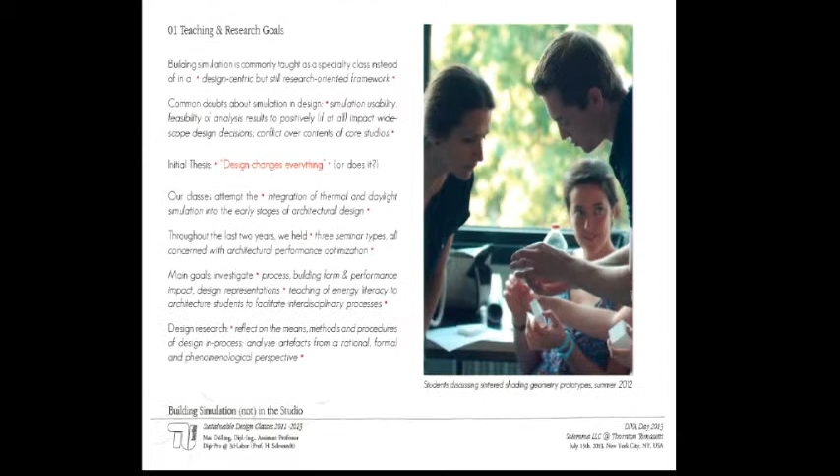Now, there are many doubts in design more than in building simulation about applying simulation in design. And those doubts include the usability of simulation, the feasibility of analysis results to positively and meaningfully impact design decisions, and that doubt still persists. And of course, a conflict of a political nature over what should be in a core studio. So our little initiative is designed to address several of these doubts and come to conclusions to then make recommendations how we can proceed with integration of these technologies, which are ultimately ways of thinking and not technologies, into the design process itself.

So there's the laser there. So what we're trying to do is, of course, investigate process, building form and performance impact on form, as well as design representations. And of course, teach energy literacy to a maximum number of architecture students in our case. So there's no technology students, it's just architecture students. To facilitate interdisciplinary processes and have them be emancipated actors in this ever-widening field that we find ourselves in. And the framework that we're operating in is a design research framework.

And to me, that includes that you should reflect on the means, methods, and procedures of design in process. And it's not a static thing where you create a result and then you analyze it and you're happy with it. But it's a process that continuously evolves as the design evolves, which of course makes analysis of design artifacts really difficult. And that has to be done from a rational, formal, and of course from a phenomenological perspective, meaning that in architecture you talk about artifacts having more value than just a pile of bricks. It's something more than that. Excuse me.

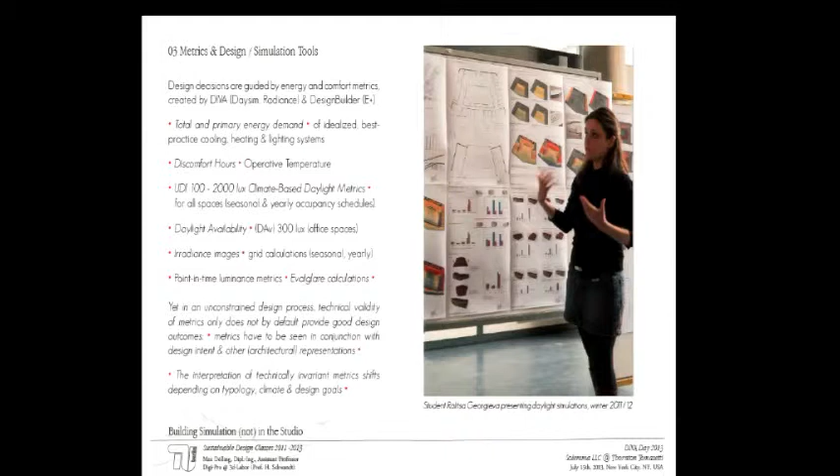So you can talk about technicalities when it comes to metrics for a very long time. What became apparent to us in the process after a while is that the technical validity itself of these metrics doesn't, of course, by default provide good design outcomes. The metrics, you got to see them in conjunction with design intent. Any given project is different, and alongside other architectural representations that encode design intent. And the interpretation of them also shifts depending on typology and climate and design goals that we have, and we'll see them shift around a little bit in the case studies right here.

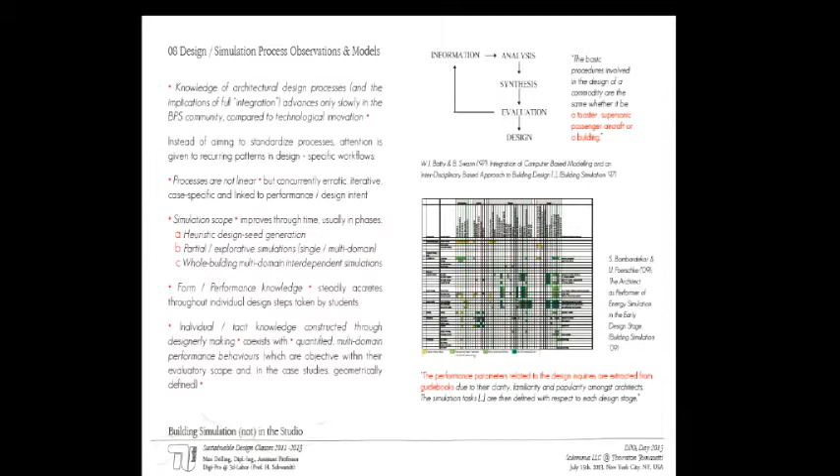So beginning maybe in 2011, there was, to me at least, a very influential paper. It's called Think Designerly by Rudi Stouffs and Raoni Venancio. And that finally began to realize that the focus of simulations is or might be to solve design dilemmas. And that was a really key moment, that we try to get away from the completely hermetically sealed parametric design processes that start with every question and end with the answers to that question. And if you insert another question in the middle, it's just going to break, right? So Venancio and Stouffs really made a major contribution.

Ironically, when you look at this chart here by Christopher Alexander and Chermayeff from 1963, what they already knew about architectural design thinking way back. This is a chart of design factor influence interlinkages. It's like two dots and they connect, and then this influences that. So 63, 2011, and we're sort of inching closer to one another.

And based on what we learned, we started to come up with our own process model, if you want to call it that. And that's more like a dynamic field. And if anything, we've succeeded in making it look different from the models before that. It looks a bit more organic, so it's very important when you come up with these process models that they have to at least visually be differentiated. But all joking aside, I'm actually quite serious about that one, because what you usually have is many different performance domains, and design synthesis. This is not a static model. It's actually achieved when they overlap, and it's all embedded in design intent.

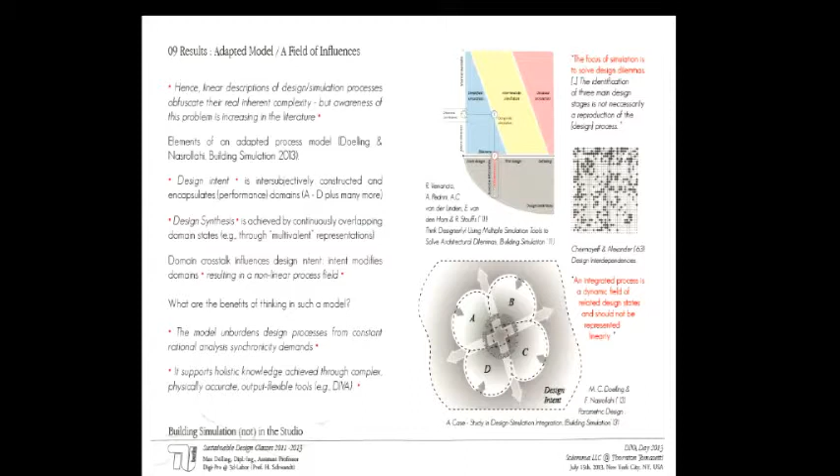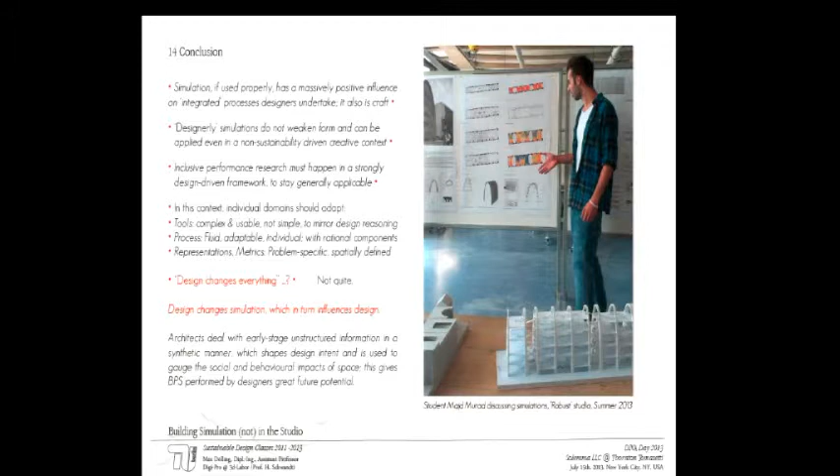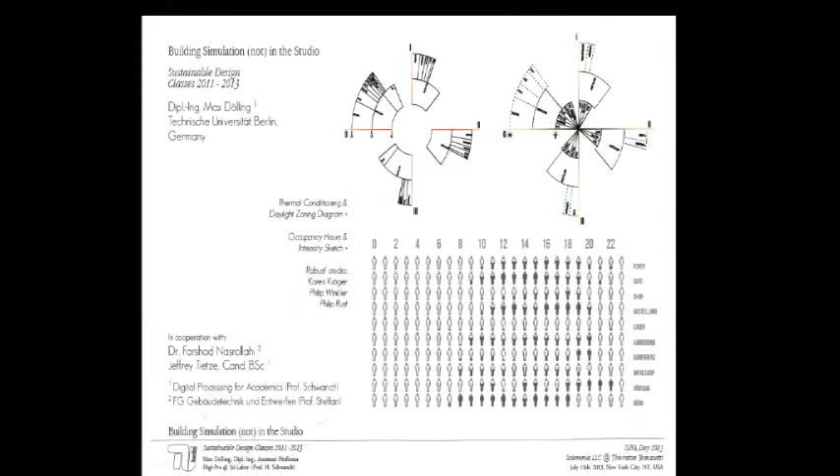I'm just wondering how you did on time in this semester. Do you feel like this was a lot to cram into one semester, or do you feel like the students had... Which semester? The Robust one here? Maybe you could talk about each of them. It seems like I'm trying to teach the same tools as you in one semester, and it is kind of challenging at times. We had three of them. Pick one. Time, as far as you're concerned as an educator, not your personal time, but in the course of the semester, trying to cram everything you want them to learn into one semester.

Okay, we had at least one 3 to 4 hour lecture every week, so that was more than 12 to 14 hours of just someone talking, be it me or my colleagues, which is a lot. And then you probably have the same amount of time just in rough tutoring. This semester was extreme because we had this class and this class at the same time, so I was jumping back and forth between two studios. And you've got to bug fix models, and it's labor intensive.

It's more labor intensive than design studio education, where you can go there once a week and tell them, look, I don't like that, can you fix it? And you come back a week later and they fix it, right? It doesn't work like that in simulation. You go in there and a week later they're back and the model is all, what are those set points? Okay, do it again. So it's a labor intensive process.

Approximately how many students are you working with at a time? How large are your class sizes? About 20. This semester was more than 30, but in groups of 2. So at any given time we have 15 or more projects in 3 to 4 different climate zones that we have to do consulting on, basically, us as teachers, which is hard.

And you were the only one? No, I did 1 semester alone of this. There were not that many students, so I'm glad. And then there's usually just 2 of us, but my colleague's not full time, so yeah, it's doable.

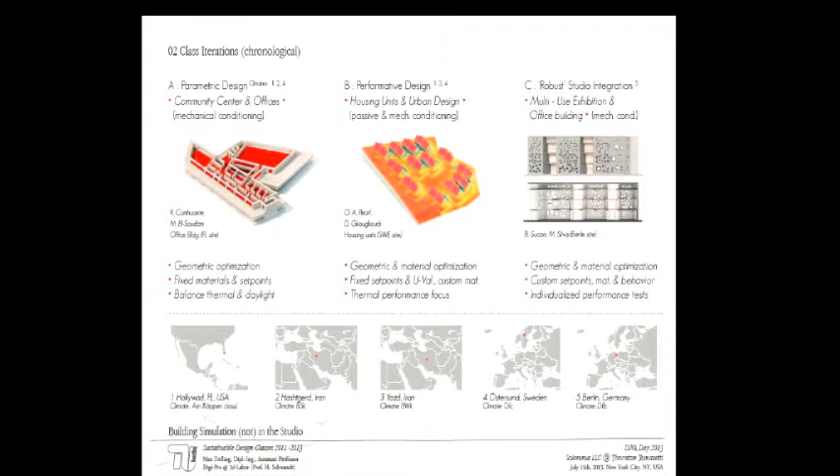Were there any steps or concepts that were really hard for the students? I think daylight is in many ways easier to understand because it's something you can see, and visualizing thermal ideas is much harder. This is something I'm not going to talk about much, I'm just going to show it. I skipped it because of time, but this is a tool that I'm going to release in September that does space-based multi-zone thermal metrics mapping, and it was intended to be used in class, but I didn't get it finished on time, to my shame.

But this maybe demonstrates that what designers need is a visual appreciation of where certain loads occur, multi-metric: this is solar gains, this is the cooling load, and this is the air temperature. And you can see that east-west is more and stuff like that. Everybody in this room knows that. Designers or students don't. So this is why they need something like this, or of course DIVA, because this is directly inspired by DIVA, just in the thermal aspect. But yeah, thermal abstraction is hard.

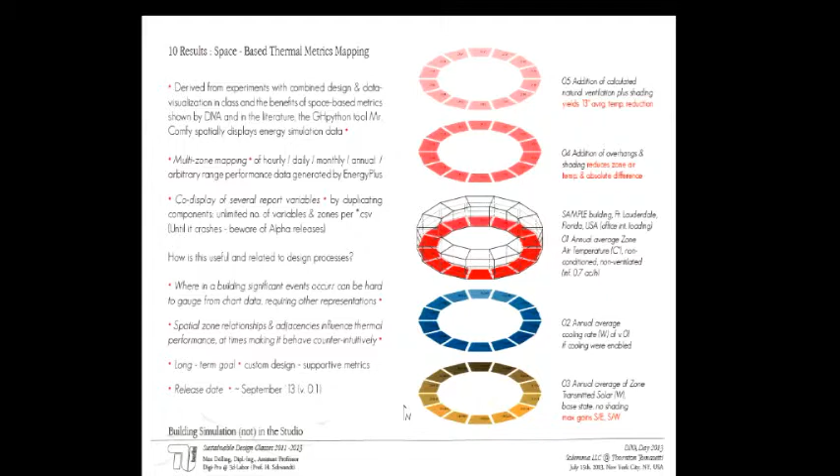I was just curious if there's any hands-on analysis, in terms of understanding where these things come from, like east-west, north-south, especially if you're doing one in Berlin, where you guys are located. Are there any analog tools to complement the computer tools? Yeah, I don't know whether I have any image of them in this presentation. Maybe.

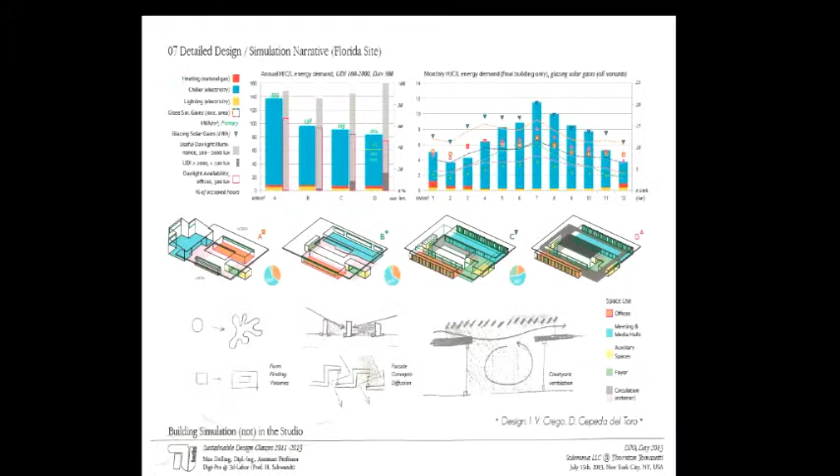No, but we built sintered prototypes. We have a laser sinter, which can build really intricate shading geometries, for example. And we iteratively prototype stuff like shading screens. It's nothing I wanted to dwell on today, but this is stuff we're doing. And they have models they can play with in the light, or facade sectional models. So there's a hands-on part.

I personally find it sometimes really limited because you can't do thermal stuff in a scale model. And we want to do that in an integrated fashion all the time. We know that the climate-based metrics are thermally correlated. As I said, improve them, and you will improve thermal performance almost automatically unless you really mess it up. So the hands-on stuff is probably not as much as I would want it to be.

I wonder if you'd comment. I think it was beautifully put when you said basically that in a good design, loads go down and daylight goes up. That's not necessarily the case in a lot of design, because it's often identified as a dilemma. So we'll attach something to that window to make it work better. But to go back and work the massing and work skylighting and these things so that you don't resort to those solutions early on, I think it's great.

Thank you. It means a lot.

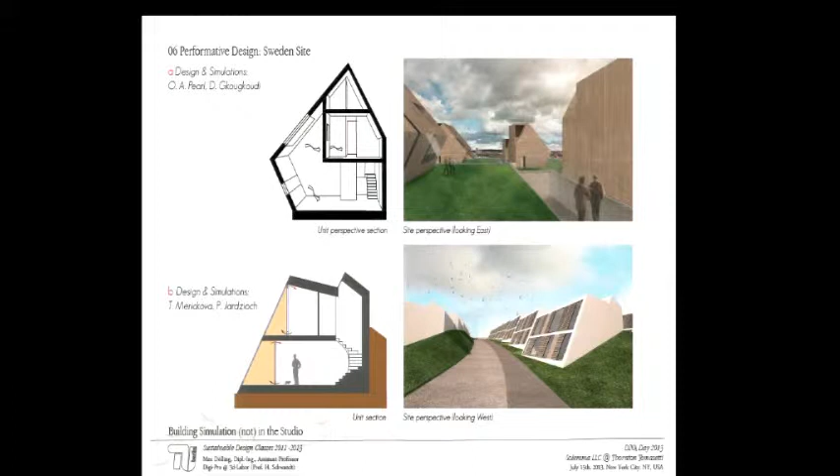You shift around between using the UDI. It's not in that one. You had the bar graph with less than 100, 100 to 2,000, above 2,000. This one? And then sometimes you're using daylight availability. Oh yeah, you see it best here. You're gravitating towards those metrics that are trying to identify or penalize overlit conditions. Where are you going with that? When do you use one versus another, or is there a certain metric that you prefer?

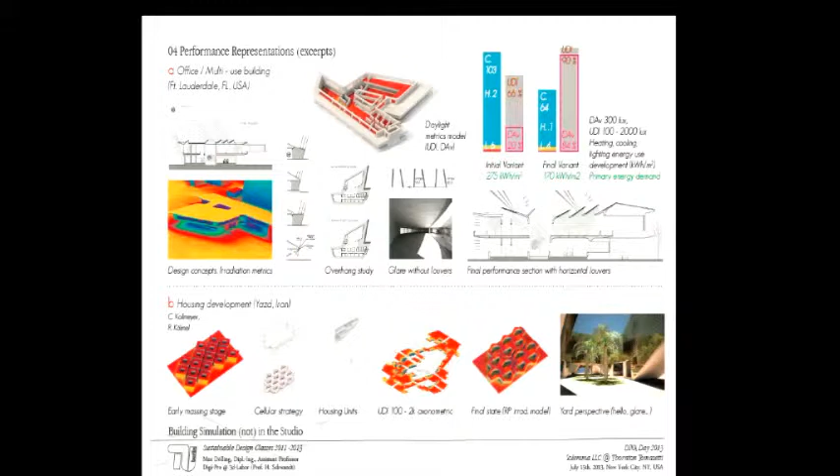I think what students understand best is actually this one, which we usually never use, but we had to use it in this case. Oh God, do they have it on here? No, I'm sorry, but basically with this group, when we worked out how they're going to present to their studio professor, we used daylight autonomy because overlit is white. So dark is really dark and white is lit. Whereas in the UDIs, understanding these three bins is challenging. Once they get it, they love it because they can really control what they're doing.

Do I have too much? Do I have too little? But for general purposes, I think autonomy is really good, and we rely on that massively in studio. In our own class, for specific purposes, I love, and students also love, the DAv because of the overlit provisions. You get the pink, and you can see it. I get rid of the pink. So we use them all, basically. Radiation mapping is underrepresented in these slides, but it's massively used all the time. Robert?

Other than the simulation aspect of things, do you also teach the concepts behind the thermal and daylighting and all this stuff? Yeah, we have like a 100 slide presentation just on daylight sky systems, what the units are, how they're derived. We're doing the same, especially my colleague Farshad. He's more from the thermal side, I'm more from the daylight. He focuses more on basic thermal aspects, what's the U value, what's heat and mass transfer. But at the end of the day, do they really listen when you tell them that?

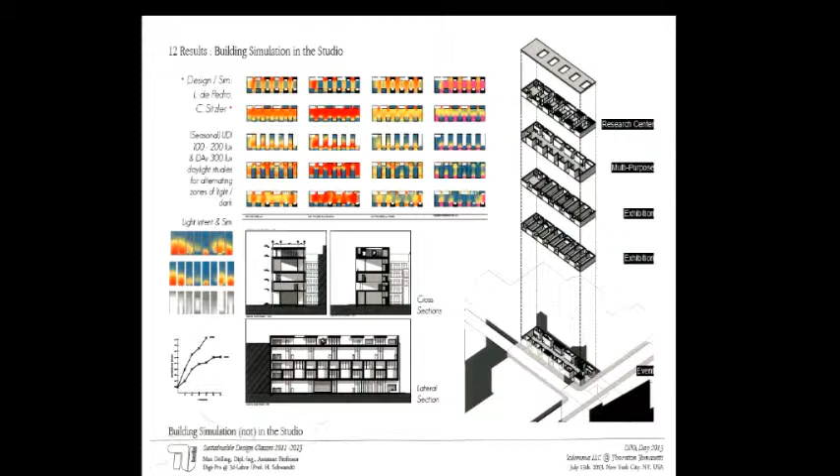In my books, that's really efficient because then they don't have to waste so much time iterating through a billion parameter spaces. No critique of anyone who's doing that. If that's what you want to be doing, cool. But we usually don't have the time. So they've got to want this thing, and they go for it. In fact, the ones who don't have design intent are the ones who fail, because they think they can derive everything from performance. The buildings they come up with are ugly and they don't perform. That's based on about 100 designs we did over the last 2.5 years. My sample is limited.